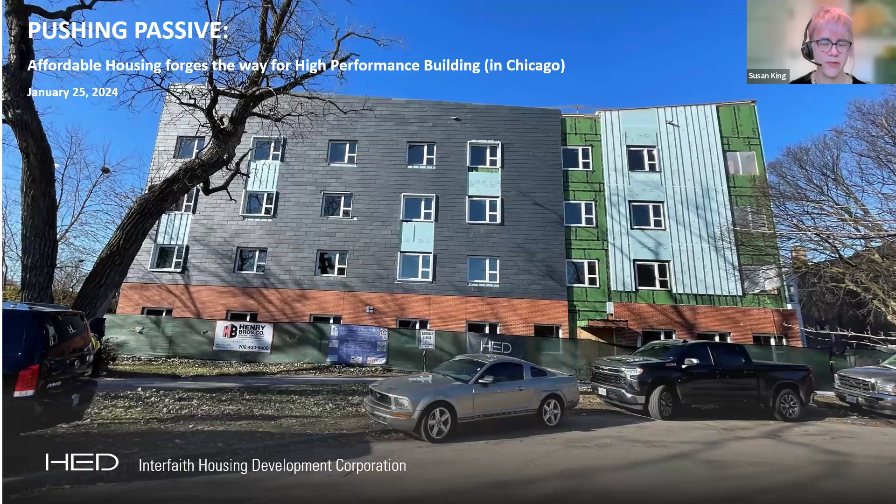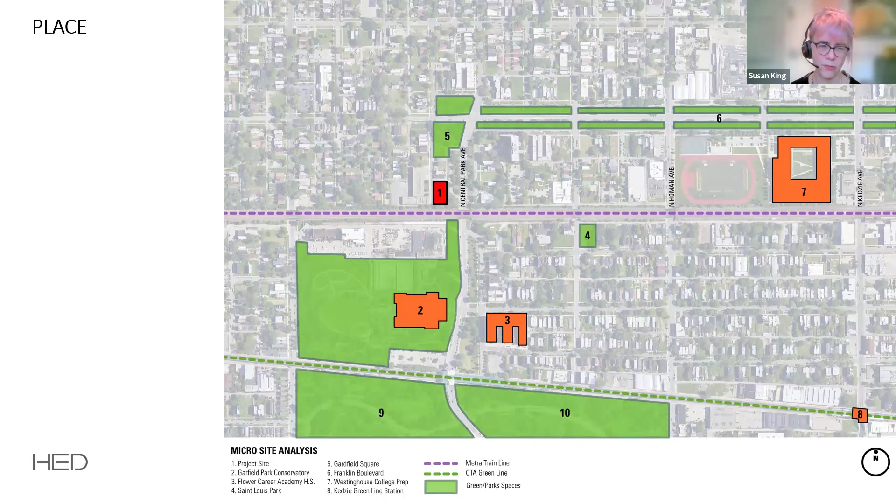Let me go quickly to the next slide. For those of you coming out today taking the train, this is the green line right here, and this elevated line—I believe it's Metra, not sure if it's also Amtrak—but those taking CTA would be getting off here. So it is actually a transit-oriented project, even though we didn't need those advantages, given that this is single room occupancy, which we'll talk about quite a bit today.

One more slide here on Garfield Park and the neighborhood. Personally, there was a bright spot for me in 2020, when Perry, my client—we don't do anything without our clients—called me to take a look at this site, because earlier in my career I spent a lot of time researching and writing about the Garfield Park structure and the neighborhood itself. So it's a spot that I feel very passionately about. I was delighted to have an opportunity to work in this crossing of two neighborhoods.

As it became a passive house project early on, the juxtaposition of these two buildings next to each other—the irony does not escape me. The Garfield Park Conservatory in its time was groundbreaking because it's a transparent glass box. And being able to build today with cutting-edge, high-performance strategies creates kind of the opposite of the conservatory. That's all another story for another day, but I wanted to mention it anyway.

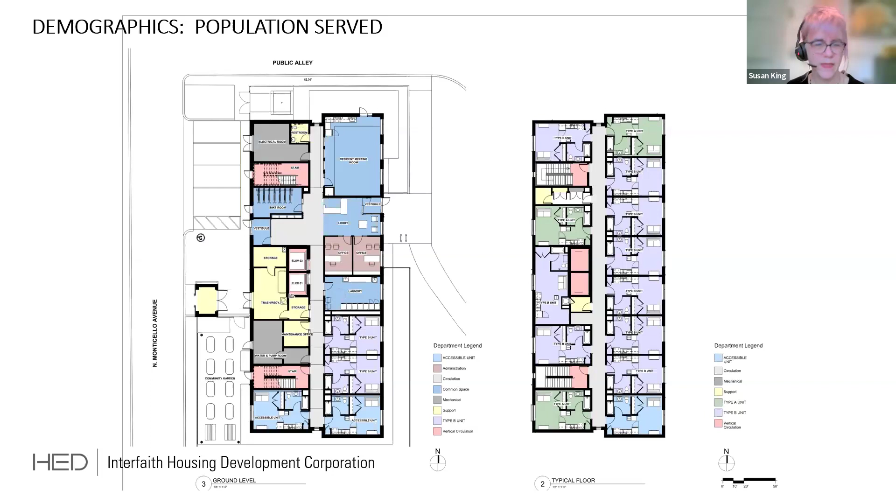We've mentioned this is a single room occupancy building, meaning these are all studio apartments, 43 of them. The floor plans, as you see here, are pretty straightforward. I'm going to turn this over to Perry with Interfaith to talk a little bit about their mission, why they do what they do, and who we're serving here.

Thanks, Susan. Hello, everyone. I'm going to spend a little time going over 5 things real quickly. Mission would be number 1, number 2 would be target, 3 would be cost—we always have to talk about cost—4 would be the land, and then 5 would be incentives. So those are the 5 quick points I'm going to hit.

Who is Interfaith Housing Development Corporation? We're a mission-driven organization that's been around 31 years. Our mission is to develop, operate, and preserve affordable housing. Our niche is really special needs housing—people at 30% of the area median income. In the Chicago metro area, 30% of AMI is essentially people at about $24,000 and below a year, a very low income standard. Most of the population we're serving are formerly homeless, special needs populations, with mental health issues, substance abuse issues, and various challenges. This place is somewhere people can hopefully become stable and heal.

That's the whole idea. And I want to be very clear, this is not an institution in any way—this is a rental building. People sign 1-year leases, and the idea is they come here to have a permanent place to stay. There's no term on the stay, like a shelter or transitional housing. This is actually permanent housing.

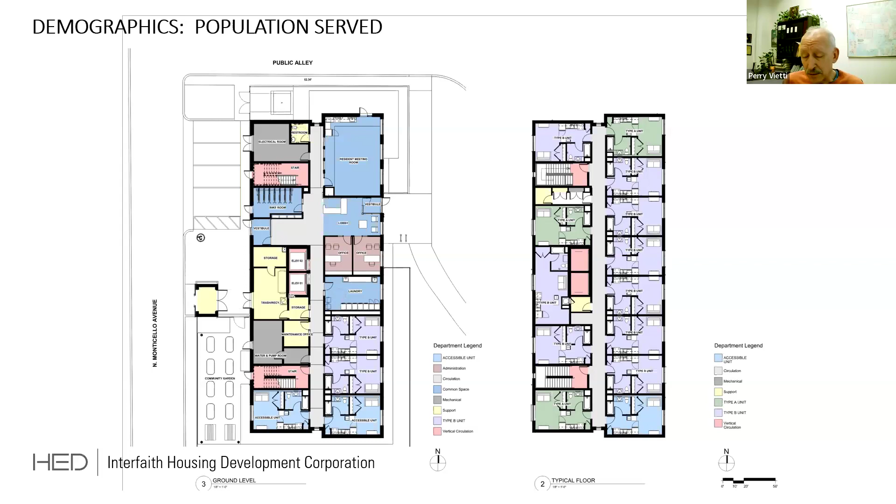Let's talk about money, the 3rd point, cost. So how much does a building like this cost? $13.3 million, okay? It's a lot of money. And like in my world of affordable housing development, it's always the lasagna financing of many layers of money. So I'm not going to get into the nitty-gritty of that and bore you with how that's done. It's essentially, you know, the Illinois Housing Development Authority was the big player here, about almost $8 million.

We have a loan from a bank, PNC Bank. The city came in with TIF funding, $3.5 million. And then we received a grant from the Federal Home Loan Bank of Chicago, almost $1 million. And then ComEd has a really nice energy incentive program, and this was their passive house pilot. So actually we were, I think, one of the first, or the first, for their pilot. And that provided some nice incentive money to do exactly what it is we're doing here.

4th, this land is a parking lot for a public school that closed back in 2013. You may recall Mayor Rahm Emanuel, there was this process of closing a bunch of schools in the city of Chicago - I think the number is 58, if I remember correctly. This is one of those 58, and they were supposed to be redeveloped. This is just the parking lot, right? Right behind us is the empty school that's owned by somebody else. I hope someday we can redevelop that, but that's not part of the scope of this. So the land we got for free, which really helped make the budget work.

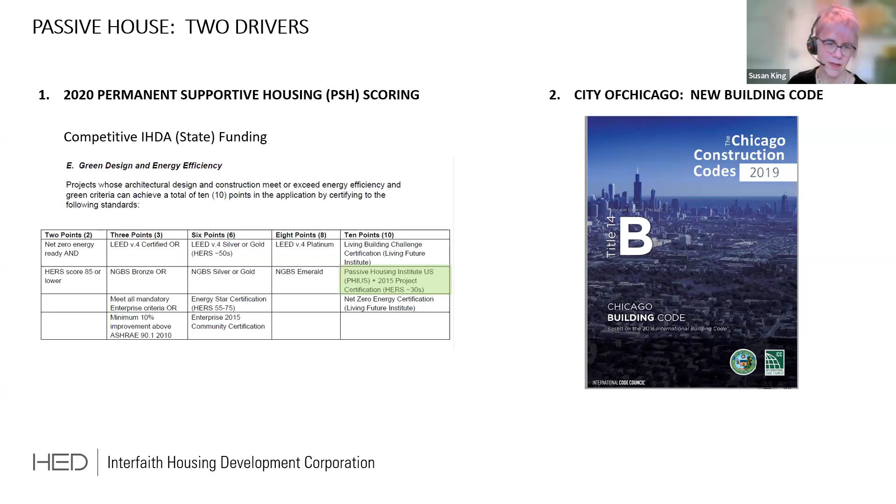And so what we saw was the opportunity to push passive, that there was an economic strategy that said, because we're building in wood frame, we're going to save money, and we're going to take that money and get triple glazed windows, the highest efficient system we can get for heating and cooling, the extra insulation. We think we can do this, trading off the structure cost for the envelope cost.

So we'll be talking a lot about what that meant and how that evolved over the course of the project. So now I'm going to turn it to Tom to talk a little bit about the passive house strategy. Thank you, Susan.

I won't get too much into the details of the standard, but the project was certified to the Phius 2021 core standard, a high performance building standard. It's a two-phase process. The first phase is the design certification phase, based on energy modeling. That's pretty much what my role in the project was, to prepare the energy model and advise the team on strategies to meet the targets. Then there's a second phase called final certification, based on on-site quality assurance, testing, and inspection. That work is performed by the Phius verifier, in this case Eco Achievers. That process is ongoing. They've passed a couple of key milestones, but there's still additional things before they get their final certification. But we are complete with the design certification.

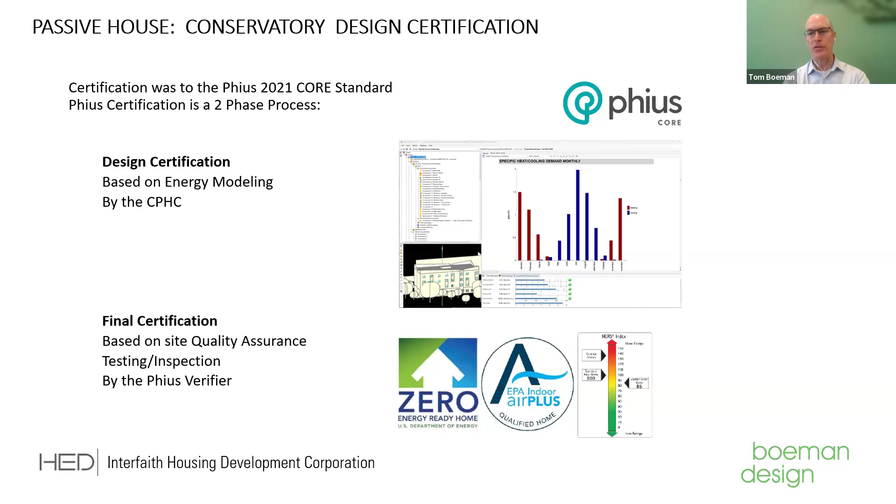So the Phius standard is based on project-specific and location-specific targets. The targets for every project are different. You go online to this criteria calculator on their website, type in a few things about your project, the envelope area, the interior conditioned floor area, how many dwelling units you have, and it spits out targets you have to meet: heating demand, cooling demand, annual heating and cooling demand, peak heating and cooling loads, as well as something called the source energy target, which reflects how much total energy the building uses. Then we use this specific software called WUFI to model it and verify compliance with the standard.

What we're looking for in this software is to get those nice green checks on the far right, meaning we passed all of our targets. On this particular project, one of the themes was that we had a very difficult challenge meeting the source energy target, just because this is an energy intensive product type. We'll see a little bit more about that later. It did need to be offset with on-site renewables, so we used photovoltaics on the roof, and that got us down to just under our passing target on the source energy requirement.

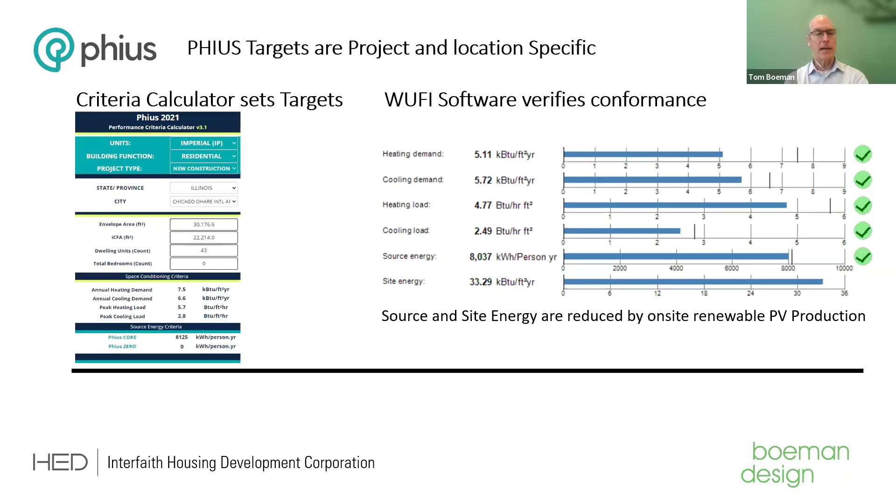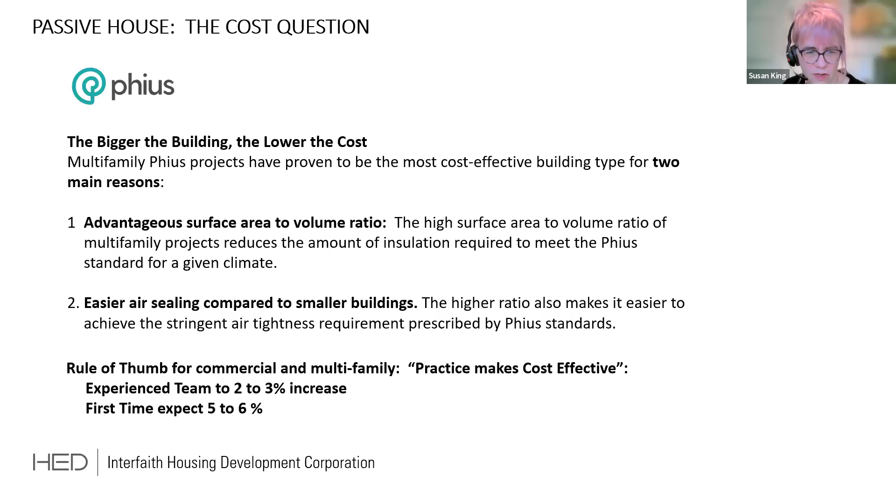And this is today. We've been very thankful to our contractors, Henry Brothers.

We've been trying to put this together for a while, and finally this presentation gave us the deadline to get it done. Big shout out to Henry Brothers for helping me with this.

These were our cost increases, broken out into the major categories that we think are specific to Passive House. Even as recently as a week ago, when I threw the 5 to 6% rule of thumb at them, they were very nervous about this. So we were very excited when they came in, if you can read the slide, at 5.8%, just under that 6%, because for most of the team, it was the first time. So this is pretty exciting.

On second thought, since we just got this, the one thing I would add now is we did not include the renewable. We're having a photovoltaic array that originally started as an allowance, not part of the base bid. Initially we didn't think we'd need it, so the building was designed as solar ready, and the PV was meant to be a betterment if we had money left in our contingency. As everything evolved, we found out we actually needed it, but it was never officially part of our base bid, it was always an allowance, and we were able to pay for it out of our contingency. So the next iteration of this sheet, I would add that in.

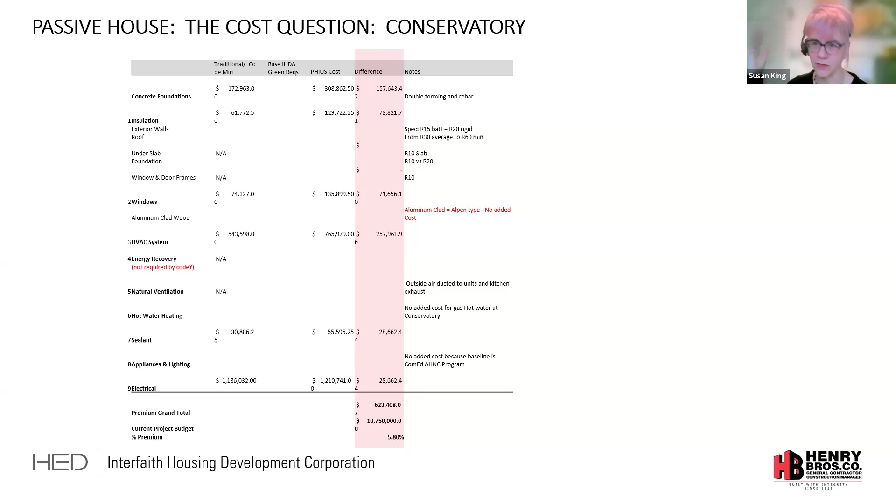It'll tip the numbers a little bit, but the other thing about photovoltaics and solar electric right now is there are so many incentives out there. We didn't pursue those, but other teams, if they needed to, could. So is it really adding cost if there's another way to pay for it? That's one way to look at it.

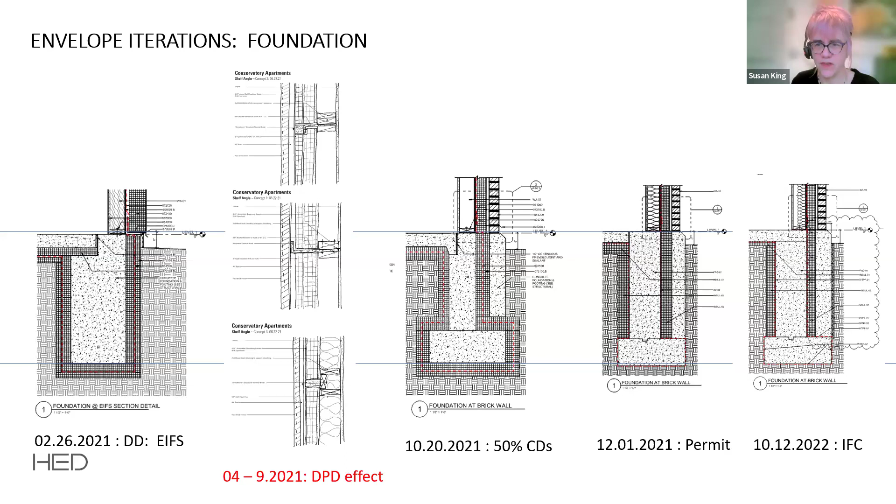Now we're going to get a little bit nitty gritty on the details of the exterior. This slide is an evolution. On the left was where we started, reflecting our original economic strategy, which included seriously looking at exterior insulation finish system as the exterior face of the building.

The 2019 building code allows that, and it's allowed on a project like this. We had many conversations in the summer and fall of 2020 with Howell Hutchinson and others, with the building departments, making sure we'd be allowed to use that material. In that case, it was a simpler foundation, and all of that on the left that we started with the wood frame.

As you see at the end of the design development phase, that was when we submitted to the department, DPD and DOH, because of the TIF dollars. Originally it was viewed that IHDA was the primary funder, so we didn't realize how much influence they were going to have, or what say they'd have on it because of the TIF money. That's what the middle sketch shows, once we submitted.

A few things to clarify too: we were not a PD, not a planned development, we were zoned by right. That was intentional on our part, to stay just under the square footage allowed, because we were trying to simplify our process. But the committee on design hadn't really formed yet, so that process was a little bit abstract, I'll say that.

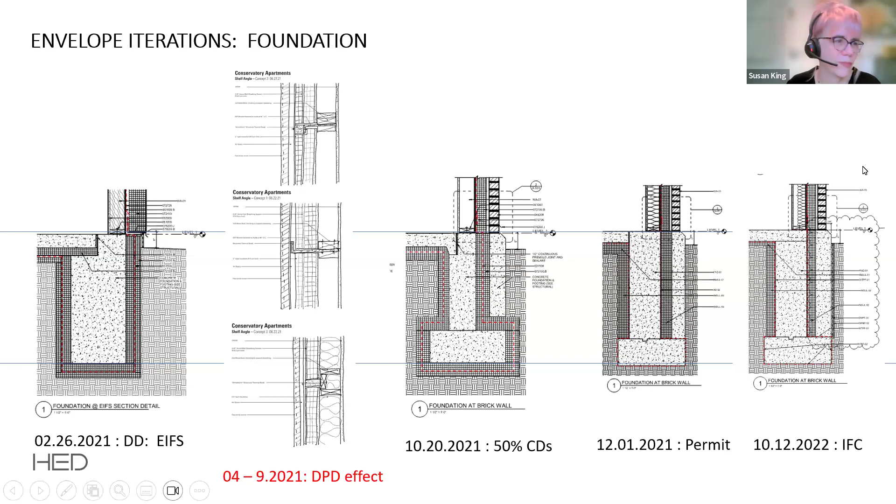Okay, and so Tom, so then he proved it out, Tom? Yeah, so it is a thermal bridge, and you do have to account for it, but it wasn't a deal killer. So we were able to work with what it was.

And invariably, there are a few thermal bridges on every project that need to be analyzed. I think there are actually 5 total on this one, but most of them are kind of incidental. They just have to be accounted for, and once they're accounted for and the model still passes, then you proceed. Sometimes you have to hit them a little harder, but in this case, we were okay with just that continuous insulation on the exterior of the foundation, going all the way down to the top of the footing.

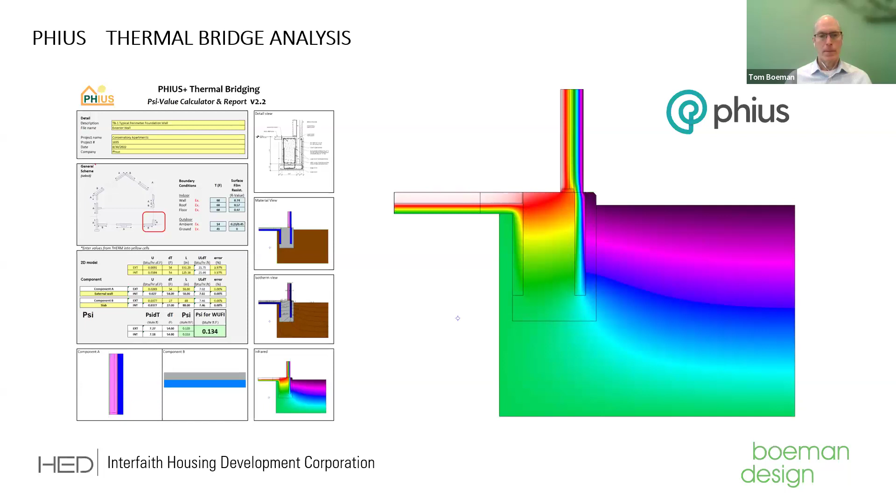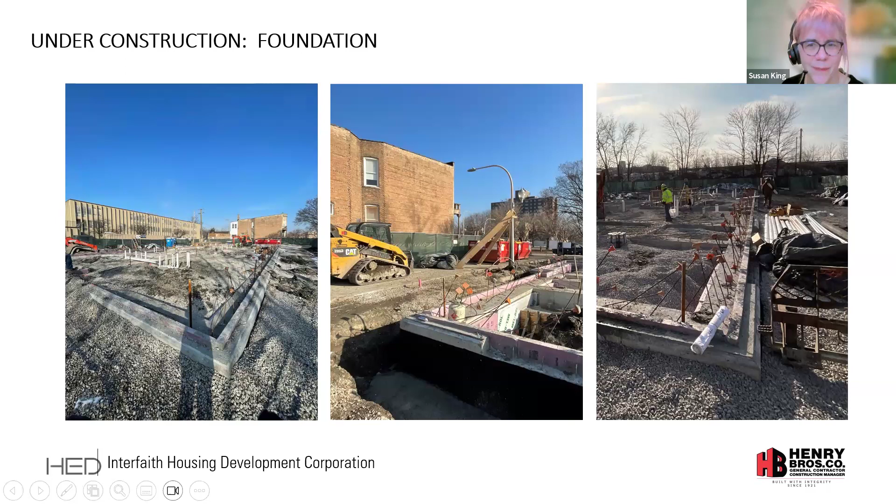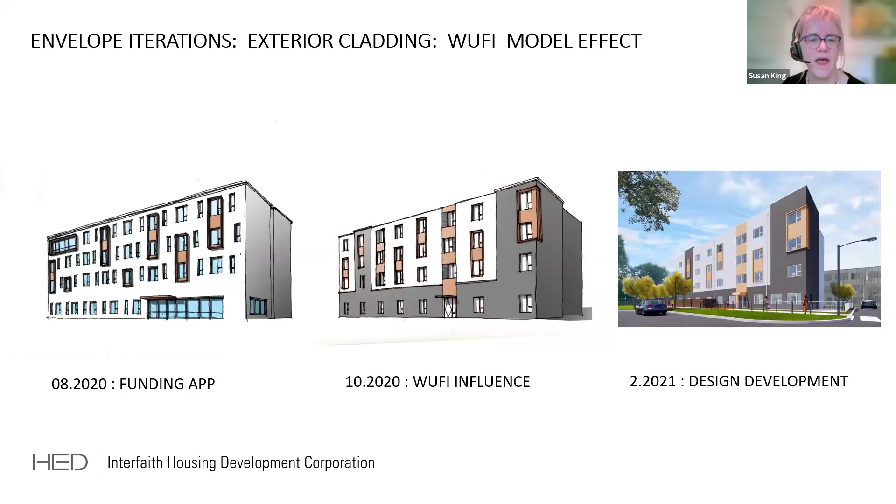And then it iterated further, because all of those were looking at the exterior insulation finish system, into many, many iterations and plays with color. I just put 2 in, otherwise I'd have a lot more slides.

So that's how we evolved into the masonry veneer just at the base, primarily the slate Cupaclad above, and then some areas of Hardie type product for accent colors.

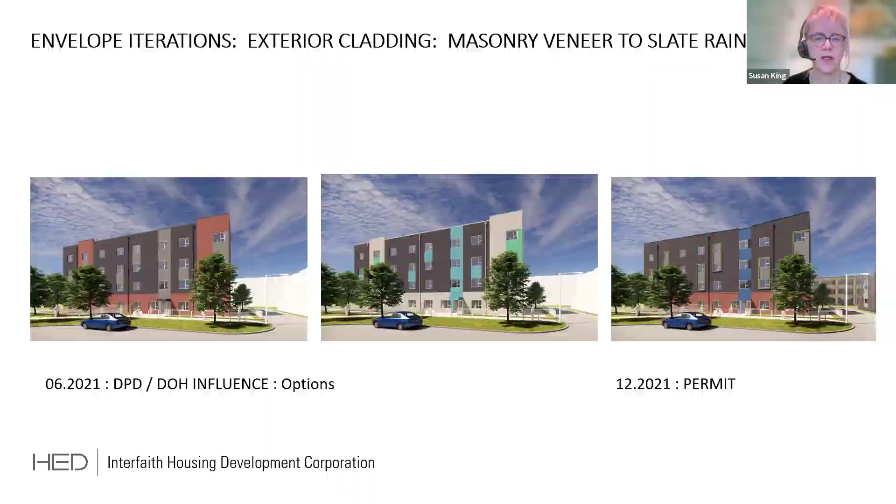I want to talk a little bit about the windows and the view. In the background of this is the view from the roof of the project, but the 3rd and 4th floors also look out over Central Park Boulevard, so you're going to have some pretty amazing views of downtown.

The one thing that didn't change was we picked an Alpen Tyrol series window way back in the beginning, and it's Phius approved. The elevation, the materials, all these other things changed throughout, but the windows never changed—they were always the same all the way through.

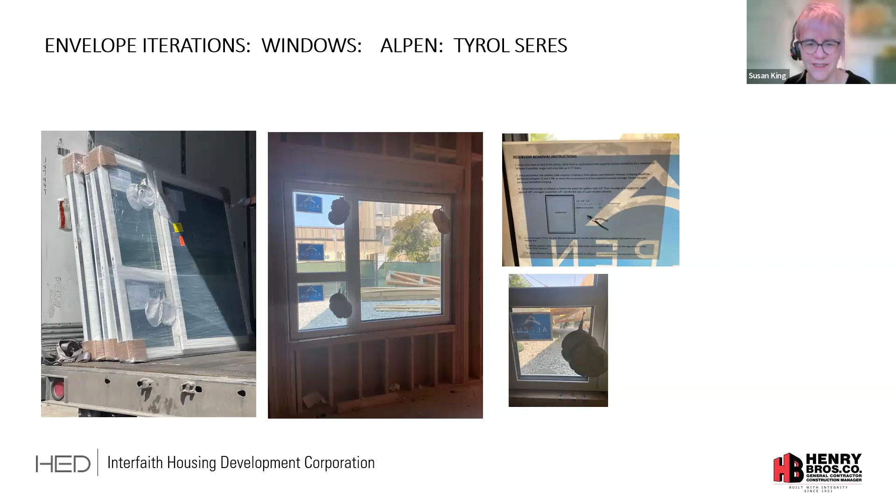For fun—I don't know if it's funny now—but it was our first time with triple glazed windows. They showed up at the site with these little pouches on them, and we were all a little afraid, worried we were going to mess them up. None of us had ever seen this before. Alpen is a Colorado company, and these windows are made at a higher elevation than Chicago, and it has to do with the argon gas somehow pressurizing as they come into our altitude. I'll defer all of that to Aaron Riley from Henry Brothers in the field—he watched a video. They were all really worried about that piece.

So again, get installed, taping—we're going to talk about taping in a minute. At the end of the day, windows are important. It's the view, and there's going to be some pretty spectacular views for the east-facing residents of this building.

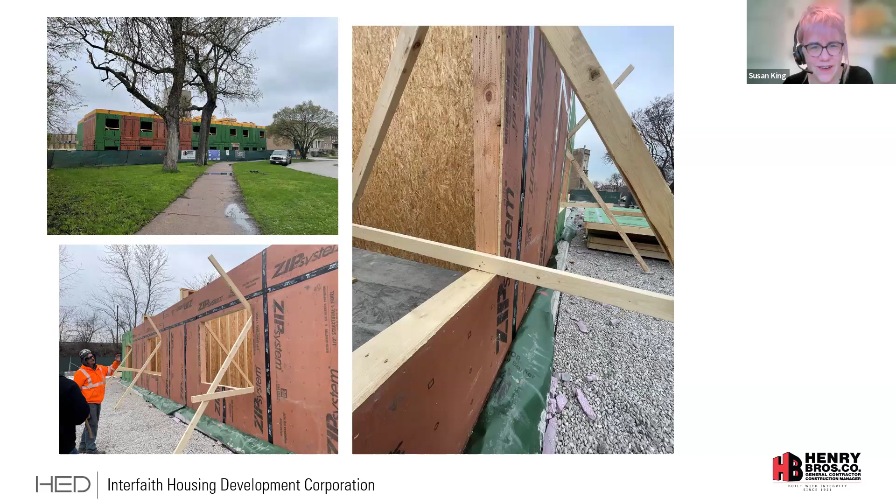Then framing—you can kind of see more of what's going on at the foundation in this, and the taping. I want to give a little shout out here to the subcontractor. In some ways we had a little bit of a hybrid team, because the subcontractor, Edon, had done Passive House before, and I think it really showed. It almost seemed like they just knew what to do, and they were great. So I always like to mention that.

So maybe we were a half experienced team, because also Tom mentioned Eco Achievers—obviously they've done a lot of this, and they were our rater during construction.

It's all about the tape on some days. One other thing I'll say—nothing to do with passive house—but the green is the normal sheathing, and the brown colored is our shear walls.

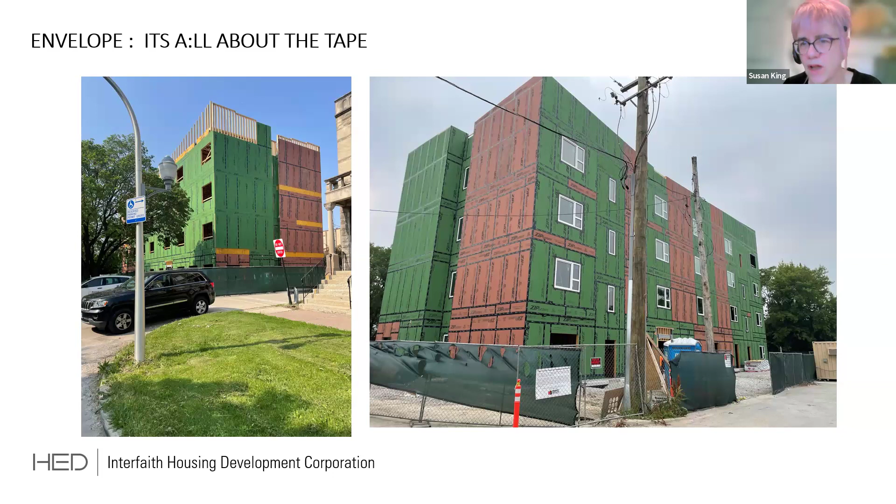Again, shout out to Edon and everybody—we were very nervous about our whole building test, one of the milestones within the Passive House certified process during construction, and we passed it, I guess with flying colors.

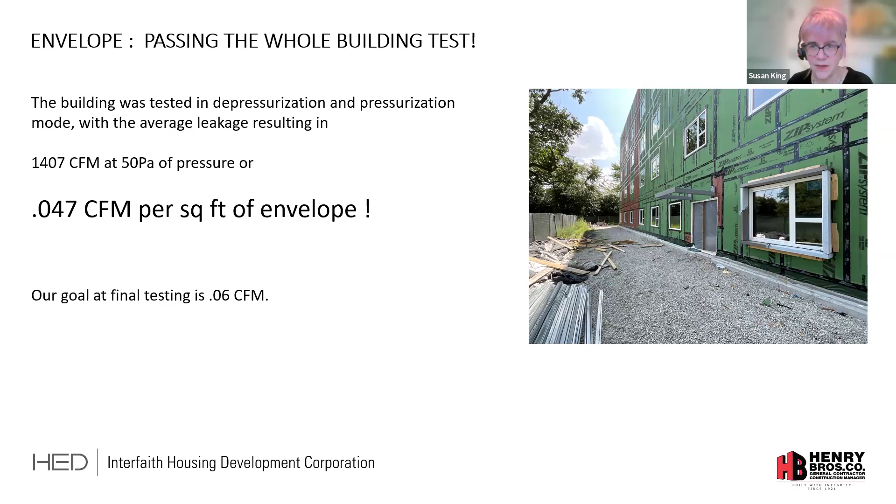I think I posted about this, and this is actually what brings us here today. I posted this on LinkedIn, and that was when Katie and Green Alliance were like, hey, we need to see this thing. So this was late summer, early fall—you have to do the blower door test before you start all the cladding, to make sure it really is as tight as it needs to be, and that sets you up for success at the end.

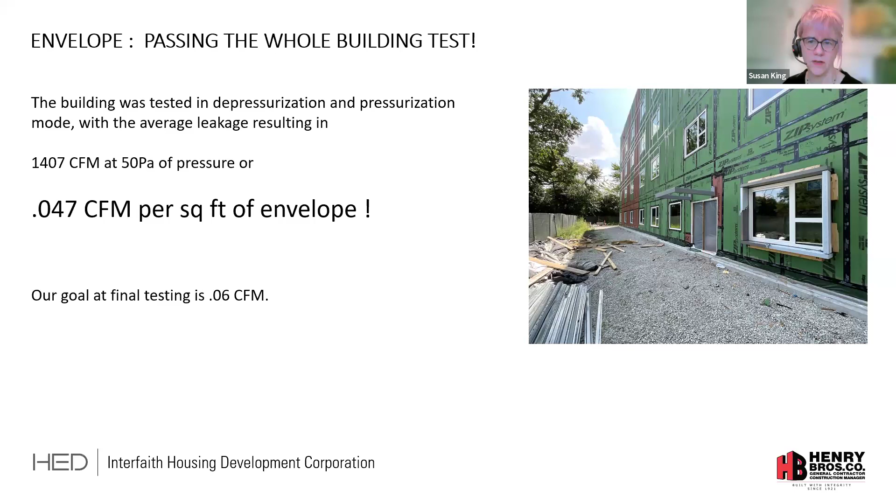Tom, do you want to add anything here about that? Only that we absolutely needed the PV to pass, to hit the source target, and yeah, we maximized it—that was kind of our hard stop.

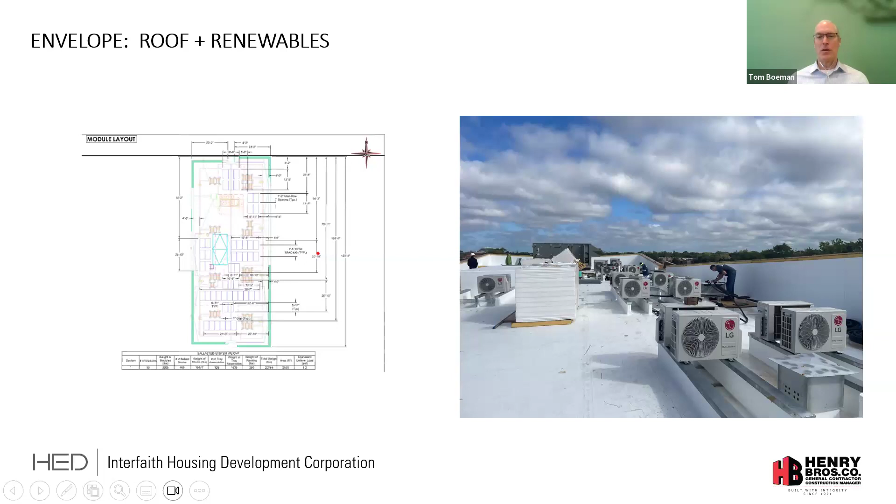Yes, and then just a couple notes about the skin. This is all closed up now, but the base, the brick veneer, is not really a normal detail. Although I will say our wall insulation was what I'd call hybrid - it was 4 inches rigid on the outboard, and then batt insulation, which I personally haven't used in a project in forever, and I was surprised ComEd let us do it.

I thought we would end up with a spray like rock wool, but this was sort of contractor's choice - we wanted to do it the most economical way. I think ComEd allowed it because we could hold it, we didn't need it to be full. Usually the problem is they don't install it right, so you lose its thermal property when they don't cut it out right around outlets and things. But we had room - the outlets and things sat in front of it, and the insulation's behind it.

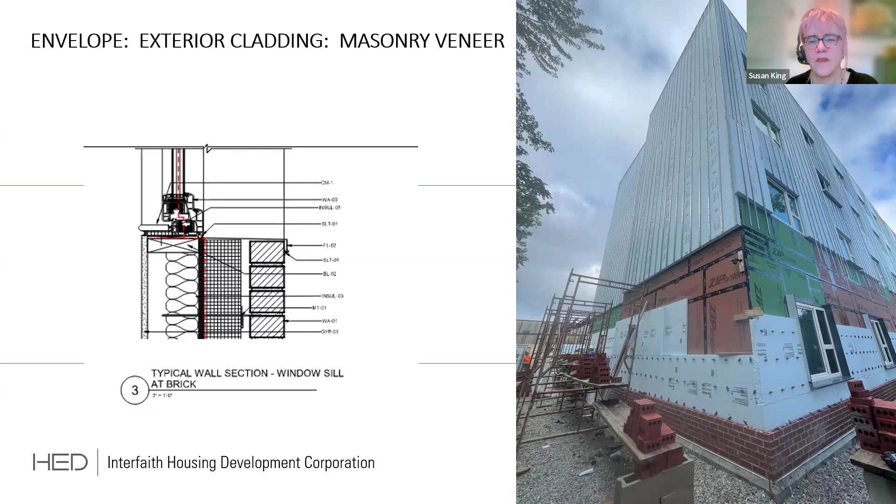So at any rate, the other thing of interest that you always hear about with passive is all the thermally broken fiberglass connections. It's kind of hard to see it here, but that's what this is - the thermally broken ties for the brick veneer. You can see them better in this shot here, for those who have never seen those before.

And then up above that is the CupaClad product, the slate, and this was actually I think the contractor's, or maybe Edon's suggestion for cost savings. We had originally supported the system similarly to how we were supporting the brick, with a thermally broken connection system, and they suggested - could we instead use this Knight system, which is a continuous insulation system that's also thermally broken. And we could do that.

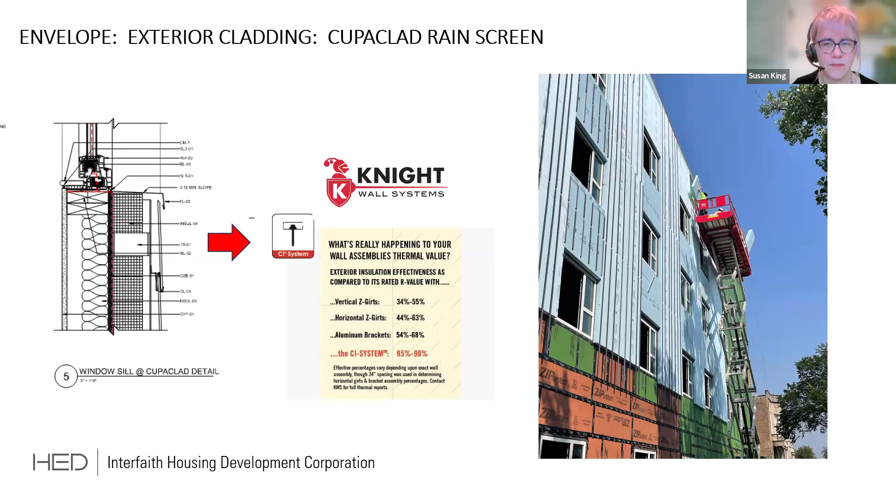We looked at it again, went back to the WUFI model, made sure that we weren't going to screw anything up by making that change, and then we were able to save money with that change. And we did it in shop drawings - we didn't update our detail.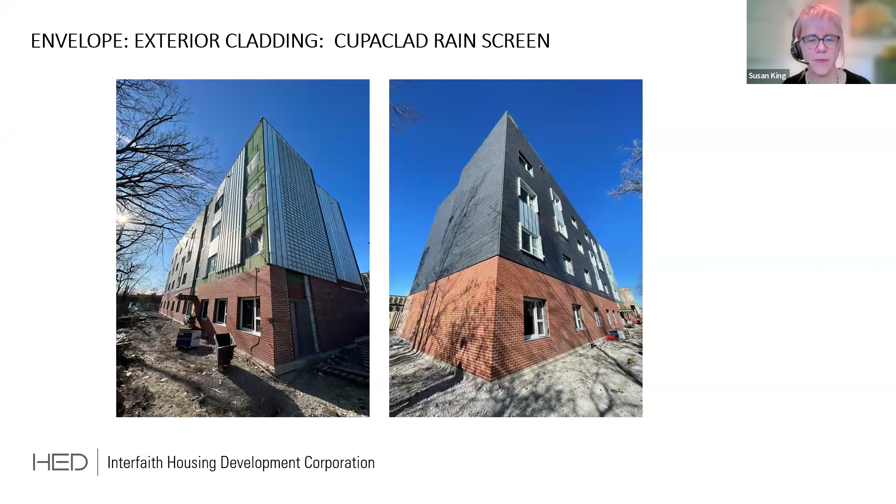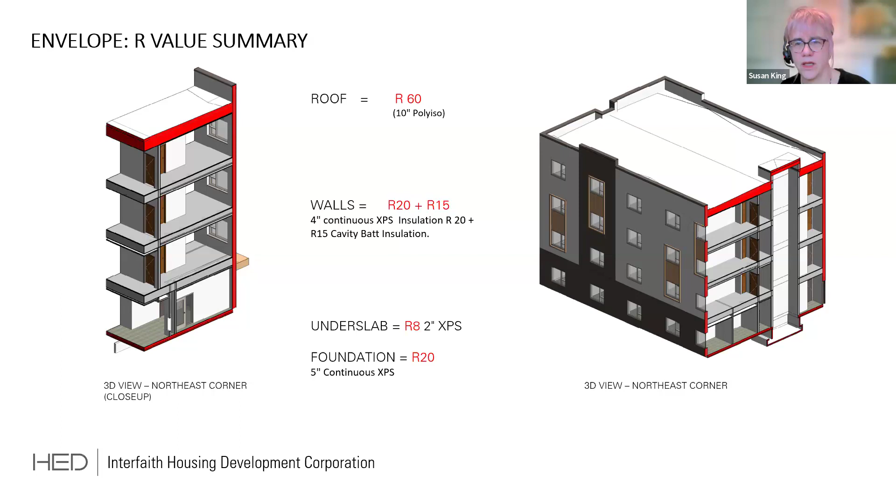Okay, so then just a couple more, kind of layering up the pieces, and a summary on the R values, because we're always asked what was the increased cost, and what were the R values again. So R60 at the roof, this combo of R20 and R15 in the walls, R8 under the slab, and then R20 at the foundation.

And then I'll turn it over to Tom. So in terms of how the building performed, these are some of the reports we'll look at from the WUFI model. One good one to look at is the heating demand energy balance. Since we're in a heating driven climate, this gives you a good overall sense of where your energy is going to maintaining the building during the winter season. So on the left column is where all your heat losses are, and on the right is where all your heat gains are, and they have to balance out so the building isn't getting cooler or hotter.

But one of the things I want to point out is there are two big blocks that are characteristic of this type of project. One is, if you look at the heat losses, a huge chunk of that is ventilation. These SRO projects are inherently heavy on the ventilation losses - that's even with an ERV that's about 75% efficient. So even with an ERV, you still have a lot of heat loss through bringing in and conditioning that exterior air into the building for the occupants.

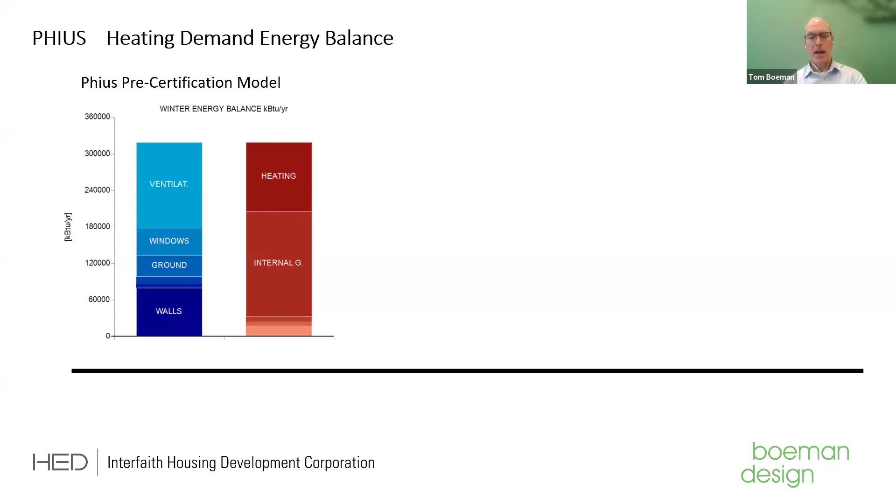And on the heating supply side, we have a lot of internal gains. This is just an inherently energy dense occupancy, and we'll see a little more slides on that.

Since we are part of this ComEd program, they have a baseline model that gives us guidance on how to compare this project to a baseline of the same building. On the left is the ComEd baseline model, and on the right, scaled to the same scale, how our building performed in terms of heating season heat losses and the heating demand balance. We were really about a 52.4% reduction in the total heating season heat loss. That's all because of the insulation and the use of the ERV, getting that extra level of efficiency in the envelope.

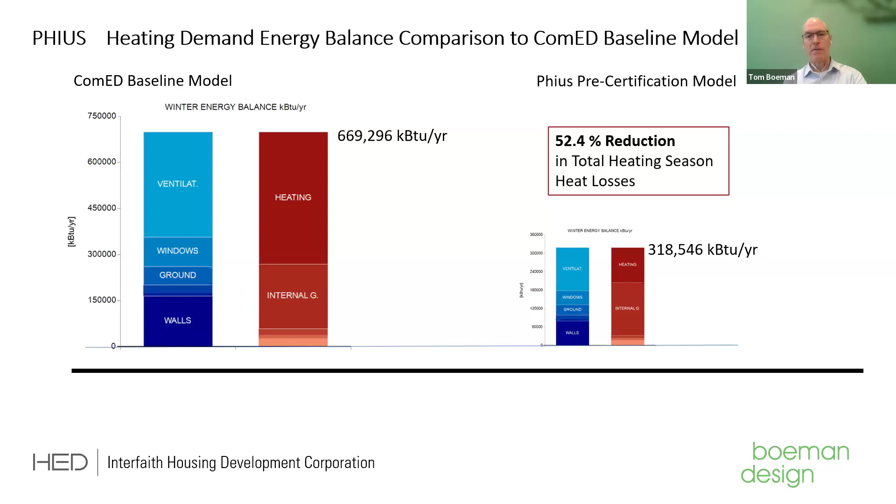The other useful report from the WUFI model to look at is something called the site energy use. This gives an accounting for where all the energy use was used in the building over the whole year. This resulted in an EUI of about 33.29.

The top two are the ones you think of most for passive house, the heating and cooling, but they're a relatively small portion of the total energy pie here. You have a lot of energy that's for domestic hot water, which is the third band down.

Auxiliary energy for fans is part of the mechanical system in a sense. But when you look at large appliances, lighting, and miscellaneous loads, the bottom three bands, those are not much different between the passive house project and another kind of energy conscious project that uses maybe Energy Star appliances. So we have a baseline of where your energy is going to fall.

You can only get so far down. The 17 EUI is kind of a mythical thing on a project like this. It's just not realistic - people need to plug in their refrigerator and have appliances, so you can only get so low.

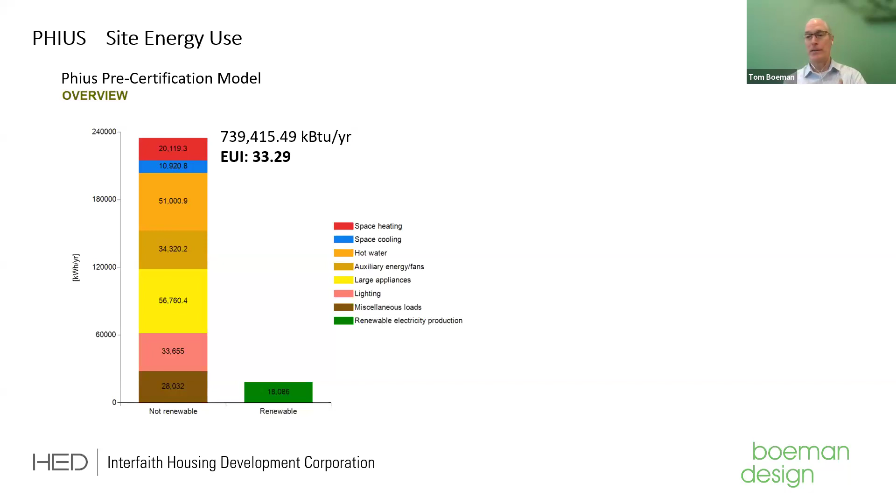If you did a similar comparison of this project versus the ComEd baseline model that we prepared, you can see we had overall about a 29.2% reduction in total site energy use from the ComEd baseline model. You can see a much bigger red block, so there's much more heating involved, and a lot more also in domestic hot water.

But everything below that, once you get down into the appliances, electrical and plug loads and lighting loads, those are about the same between the two models. So it was really in those top bands, the heating and cooling and the domestic hot water, that we were able to make the most energy efficiency effort.

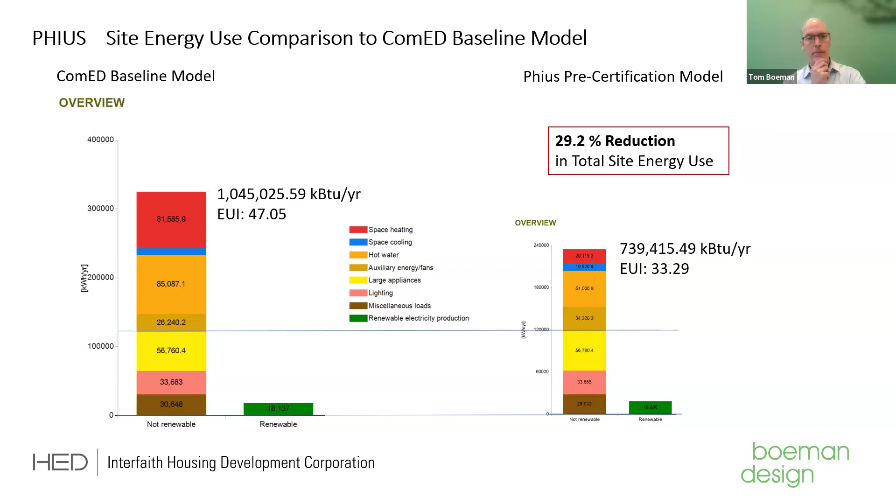This is kind of a question that came up, and a study we did after the fact to explain how this issue of single room occupancies works, and to point out why it's an inherently energy intensive use. What we tried to calculate here is, if you just wanted to account for the energy used in the unit itself, for heating and cooling the unit, for the ventilation to the unit, but not taking into account corridors and common areas, just accounting for what happens in that volume.

If you looked at what the EUI would be for a typical 3-bedroom, a 2-bedroom, a 1-bedroom, a studio, you can see that it goes increasingly up as you get into these smaller and smaller footprints. So the SRO would be up to 39.3 kilo-BTUs per square foot per year.

And that's again just for the unit. That gets diluted a little bit for the common areas, but it's almost twice as much energy density as you had for the 3-bedroom, which is only 21.5. So it's just an inherently challenging product.

So when you go comparing EUIs between your friends who are also doing multifamily projects, this wasn't going to get down to 17, it wasn't going to get down to 20. It's just a very challenging product type.

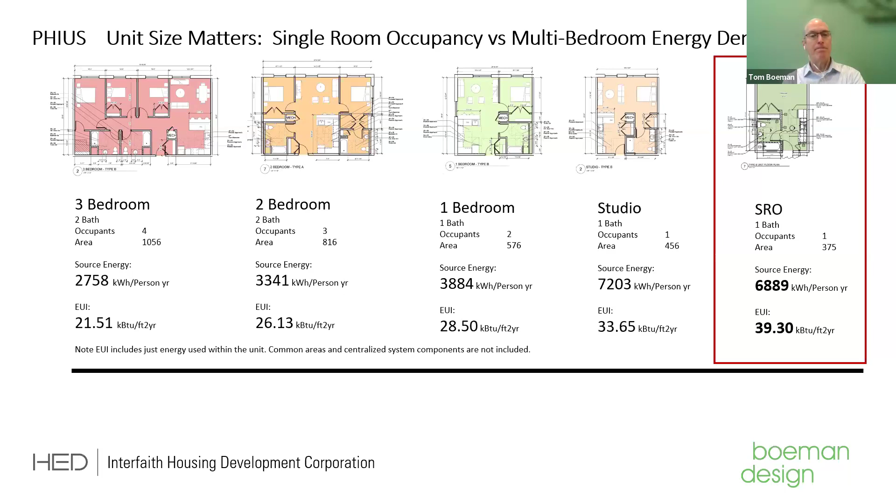So the reasons for that, what drives all of that, are really two things: the ventilation requirements and the appliance density.

So for ventilation, for any Phius project code minimum, you have a minimum exhaust ventilation of 25 CFM per kitchen and 20 CFM per bath. So there's a total of 45 CFM total that has to be exhausted from that unit, and that has to be made up for with supply air.

Typically, Phius would recommend 18 CFM per person, but you have to balance it, so we're providing 45 CFM per person. When we're looking at a 3-bedroom though, we would be down to like 72 CFM total, rather than the 45 that we have in the SRO. So again, we saw in the energy budget that we're doing a lot of energy for just heating up this ventilation air.

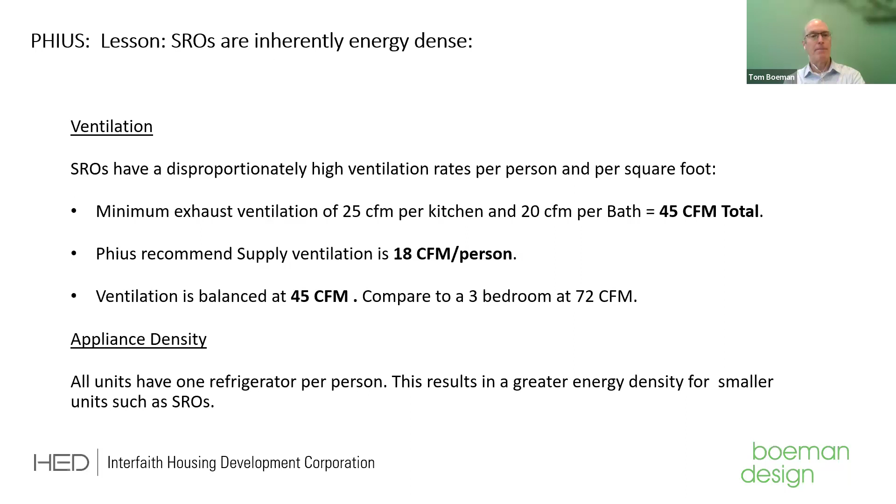That's why this product is inherently energy dense, because we got a lot more ventilation per person than we typically would want or have to have. And also appliance density - every unit has a kitchen, and a 3-bedroom still has just one kitchen. There's a few more people cooking, so there's a little bit more energy associated with it, but all of them having a refrigerator, whether or not they have 4 occupants or 1. So that contributes to an increased energy density just for that product type.

But on the other hand, Phius knows this, and they've modified the standard to actually make it possible to do these projects. The Phius Plus 2018 version of the standard, which is what this project started under, had a fixed energy target of 3,480 kilowatt hours per person per year. We'd have never been able to meet that. And when they developed the 2021 standard, they recognized they were not able to certify any of these products, and these products need to exist and need a path to certification. So they modified the standard to actually make it possible.

So our target on this was 8,125 kilowatt hours per person per year, which we just barely met at like 8,034. So you can see that trying to meet the 3,480 of the 2018 standard would have been effectively impossible. We couldn't have even offset that with photovoltaics because we didn't have a big enough roof. We would have had to make other kind of purchasing arrangements or some other arrangement for it. So this is just something that Phius recognized and adjusted the standard because this is an important product and needs to have a certification path.

Tom has mentioned the ventilation situation, and that was definitely a challenge for us as well. We decided to have 3 speakers today because we only have an hour, but there was also talk with Katie and Green Alliance about part 2 of this, where we could bring in our engineers who we haven't even mentioned at all, CCJM and Eco Achievers. The builder's going to be at the site today, but it's definitely a team effort.

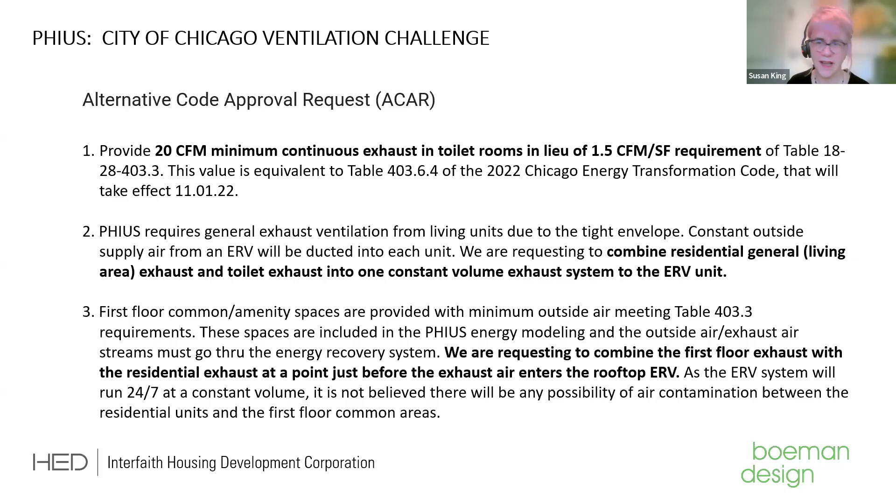He even stepped in and helped us get through this. But according to what he was hearing, same as what I heard as of yesterday, unfortunately teams still should prepare to have to submit this and go through this procedure. Hopefully it's just a procedural step. But this is - I didn't know how to visualize it, so I just gave you guys exactly what we asked for.

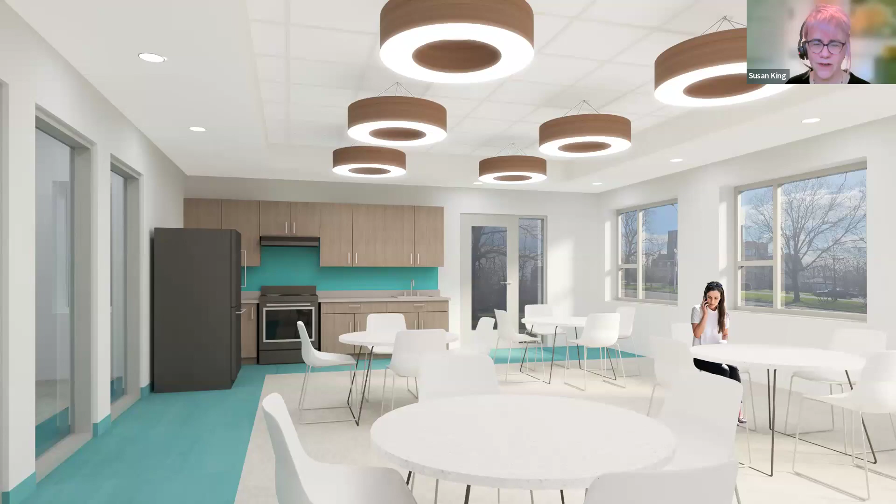And then these are just some renderings of what the interior will be like, and another great view from the roof out there. I think that's from the roof this fall. And in conclusion, it seems like you're building a Cadillac, but why shouldn't we build better? And better usually costs a little bit more. It's true.

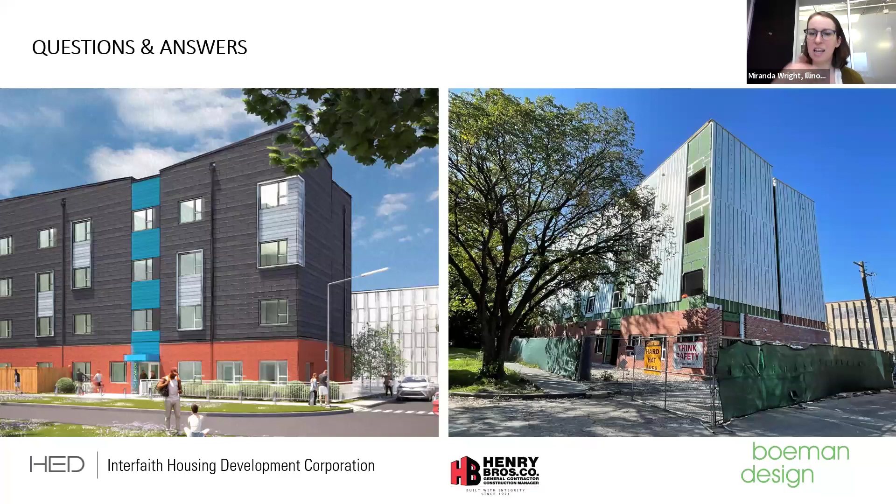Had brick been required, would it have been possible to accommodate the relieving angles without introducing a major thermal bridge or moisture issue? I'll take that, that was our big concern actually. You can always answer that with, you can do anything at a certain cost. Today, now that I've seen a lot of things being done, I would look to New York City, because they're doing a lot of really tall, large masonry, what I call the more traditional masonry cavity walls. But I think they may not have to have the relieving angles in that case because it's CMU and brick. So we didn't solve that because we were able to get them to accept the Cupaclad.

I don't know if Tom sees a lot of this. Well, we've seen a few projects, and it does result in thermal bridging, again like the one at the foundation. Well, is it a deal killer? You'll have to find some other way to make up for it. So it might have been 6 inches of insulation instead of 4 behind it. There are little trade-offs you can do. It is challenging. You can't just run a horizontal steel angle that penetrates the continuous thermal insulation on the exterior. You'd have to do some detail where that's offset with stainless steel bolts on one of those fiberglass pads. So we can do things to mitigate it, and then it's running the numbers and working it till it works.